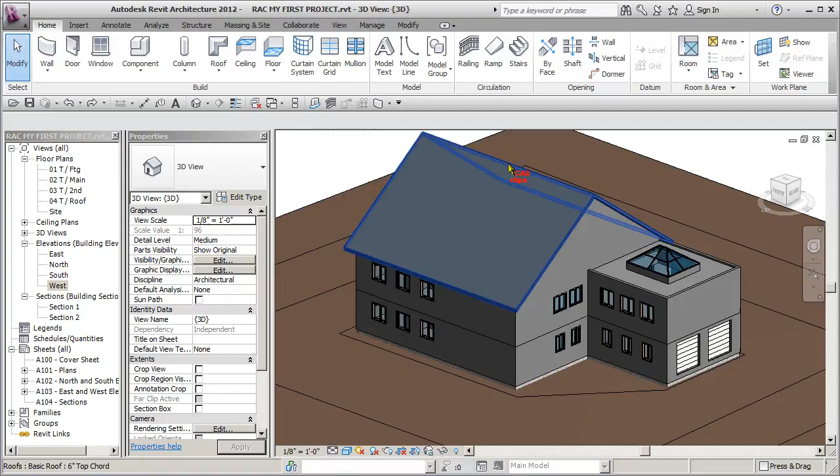In this lesson we're just going to do a couple of miscellaneous cleanups I've been taking notes on. One was on the second floor, I had an underlay I believe. Oh, maybe I fixed that. What about the main floor?

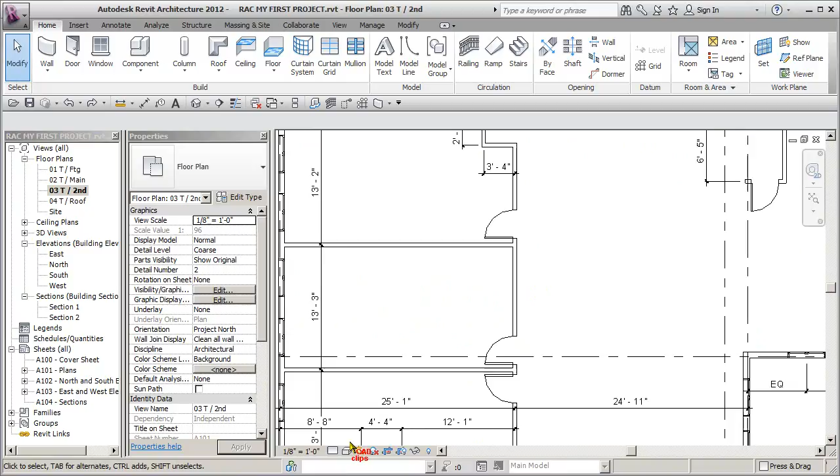The main floor, I need to fix these object styles here. It's interesting how this is showing up here but not on here. The reason is this is set to fine or coarse detail, and the other one is fine detail. You won't see those in between lines unless you go to fine detail. So I need to fix those object styles.

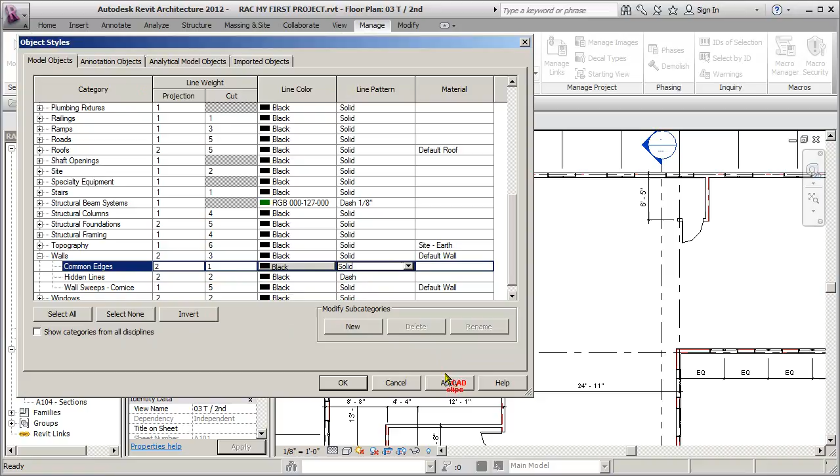So under manage, I'm going to go to object styles, and go back to my walls. I'm going to go to common edges, pick on here, and say just black. Hit OK. The color in that is good, but I don't want that, I just want a solid line. Apply and OK, and that's going to fix all the walls and all the views.

So a couple things there. One is you're not going to see the guts or the inside of the walls unless you go to medium or fine detail. Coarse detail doesn't show it. In fact, with coarse detail you can make it so that it shows as solid filled. So that's one thing we wanted to fix.

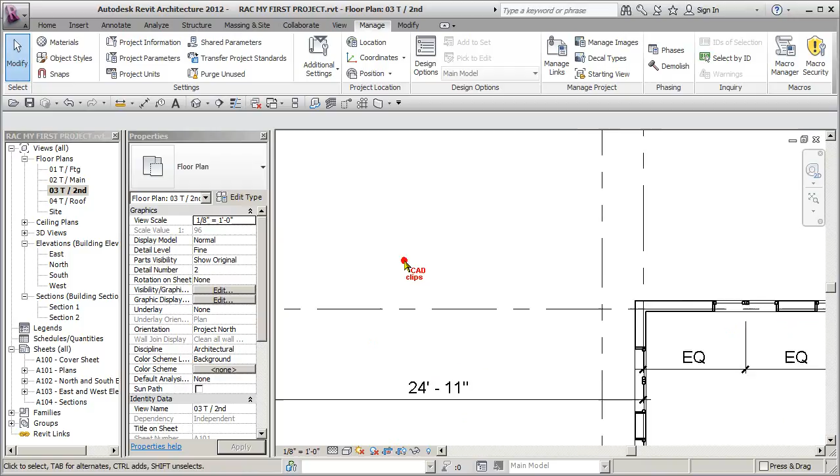I did want to make sure we had all our underlays fixed. Let's go to our roof plan. No underlay there. Second floor, no underlay. Main floor, good. Footing, good. Now look at this.

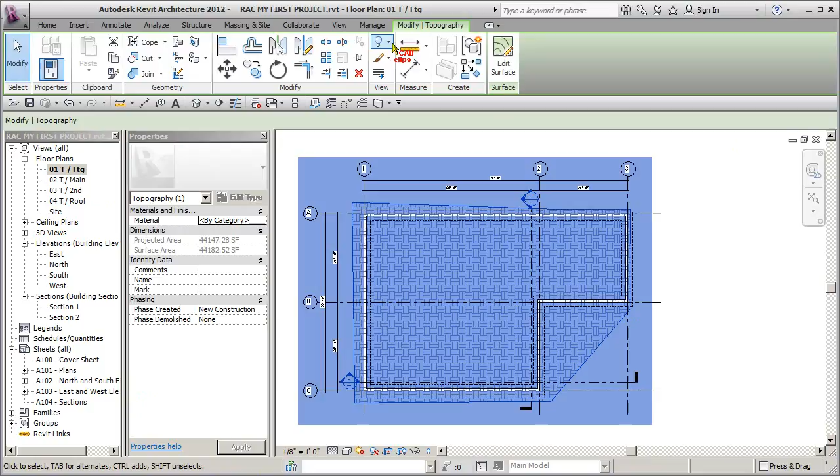We've got in our foundation plan a topo surface. So we're going to pick on here and say hide the category. We don't want to see the topo surface category. We still have some work to do on that foundation plan anyway.

That was also showing up on our elevations, and we fixed that as well. So our roof plan is good. Now our roof plan, what do we need?

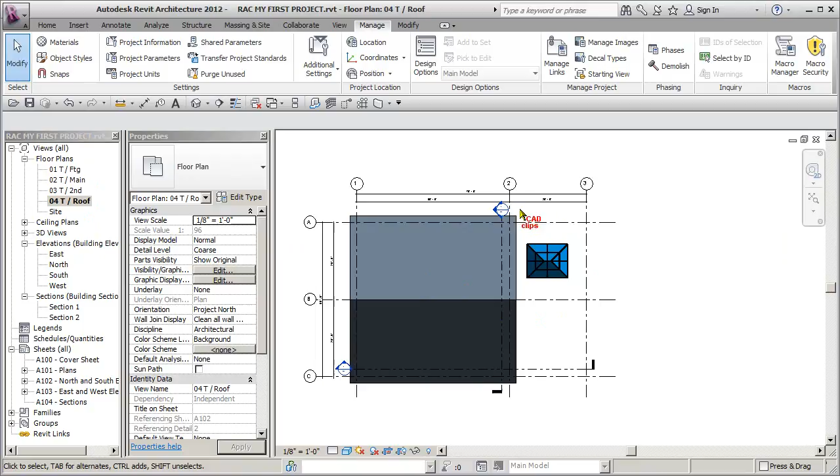We need a view range adjustment here, which is called a plan region. So what we'll do is add in a plan region. Watch, we're going to go to view, because the cut plane can't - it's up above the roof, and the bottom part, well, let's just see if we can fix this with our view range for a second.

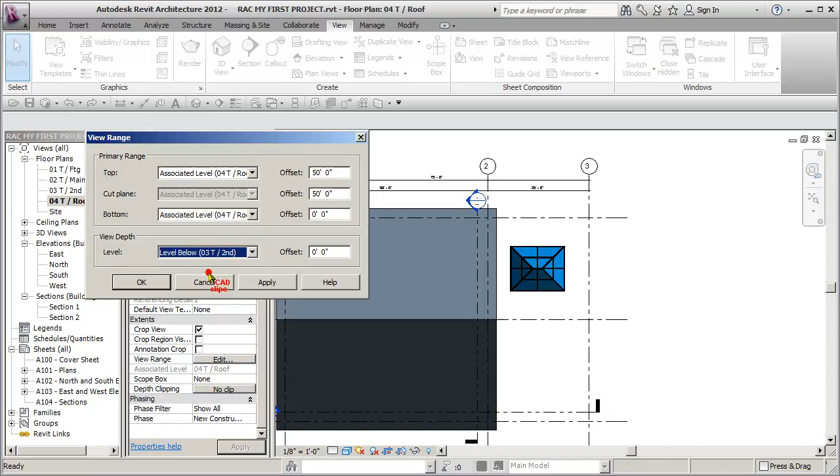Let's go to view range, and let's set our view bottom to be top of roof, but let's set our view depth down to say top of second, and hit apply. There we go, I didn't need a plan region for that. We'll come back to a plan region later. We actually just solved that with our regular view range.

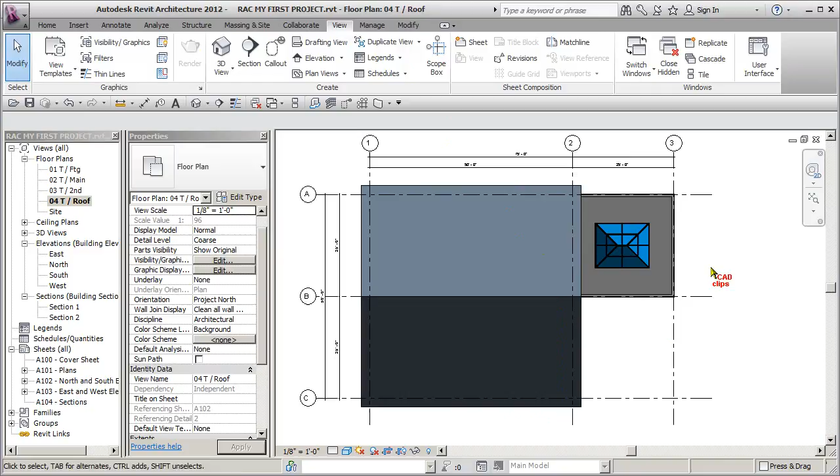Now maybe on our roof plan, I'm going to use my control button to pick these two guys and hide that category. So I'm just going through the views doing some miscellaneous updating. Site plan looks okay for now.

Okay, how do our elevations look? Not too bad, we can add shading and detail. Oh, we need some windows over there. We need to add these 3 windows, and I believe there's 3 windows above on this side.

So what are we going to do? Do we want to do it in plan or in elevation? I'm going to do it in elevation. I'm just going to go like this. Okay, and it's going to say that I have these windows. So what am I going to do? I'm just going to go like this, and say copy.

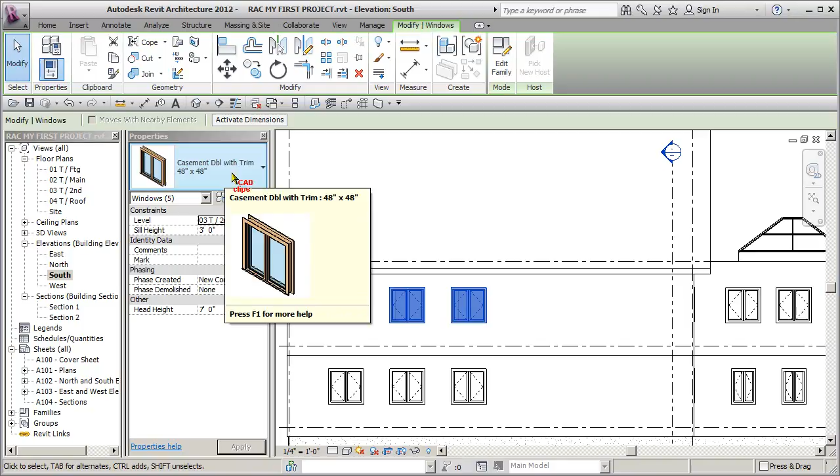Who cares, from here over to here. I'm not even going to worry about the distance. Escape, escape. Okay, that's actually not too bad.

Let's go to our second floor. Now I can take this and say edit witness line, which means continue from there. Over I go. Okay, escape, escape. Well, just a sec now.

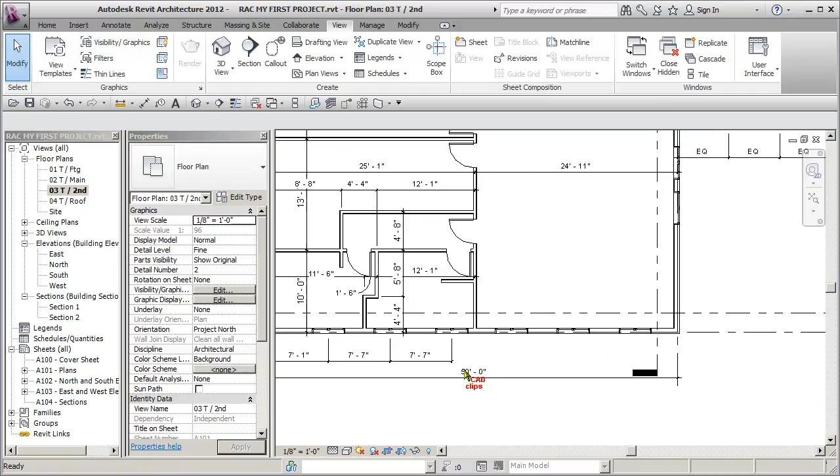That did something funny. Edit witness line. Here, here. Escape, escape. Now there is a piece of a dimension in here.

I'm going to turn my press and drag back on. That dimension, I'm going to delete because it looks like it has something that's not visible here. I'm going to turn that off. I'm just going to create a new dimension - not sure why that's behaving that way. Go from here and then go through these windows.

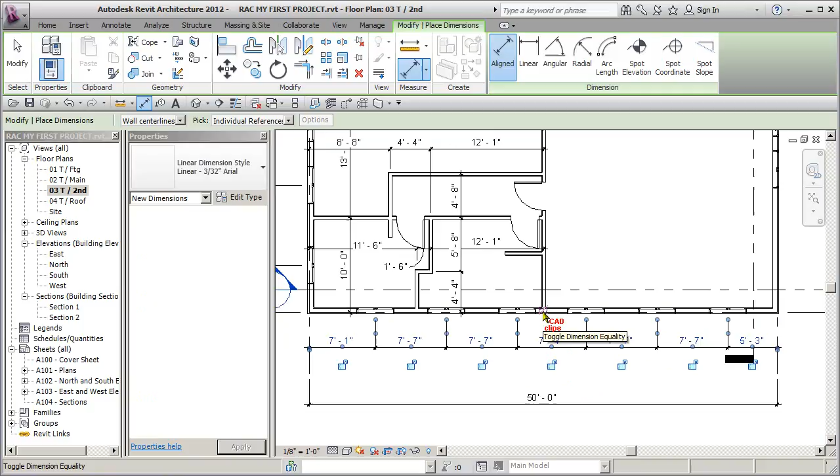It's very easy to just delete and select. I think there was another leg of dimension there, but for some reason it wasn't showing it to me. Click on there. Now, do I want those equally spaced? Look where the equal is there. Click - now it's equally spaced.

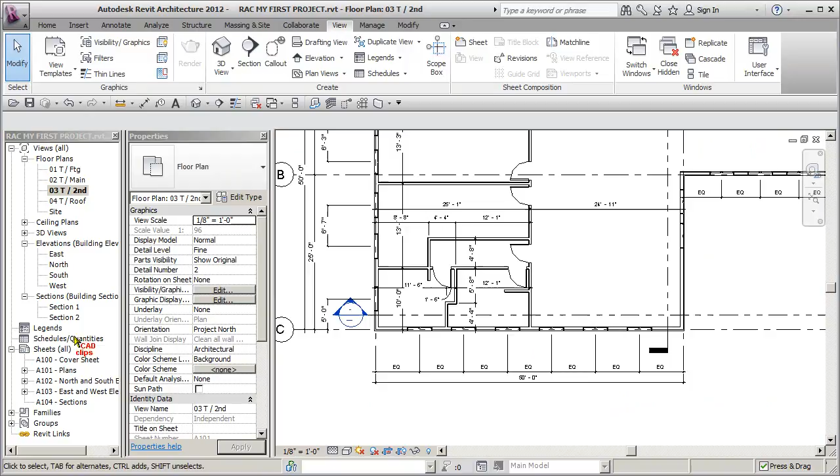Escape, escape. What does that do to my windows? That kind of works with my walls. Do I want to pull this out a little bit? Maybe pull this back a little bit. Take this, use my arrow key, nudge, nudge, nudge. Now when I go back to my south elevation, they're going to be all beautifully spaced there for me.

Now do we want to maybe vertically align these? Let's do this, let's go to modify. Let's say align to here, this guy. I can even lock it. Align here, this guy, lock it. Align here, this guy, lock it.

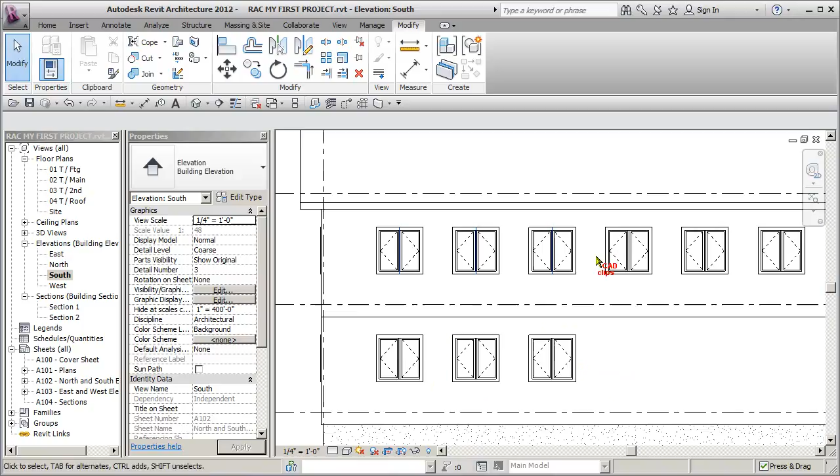Now this is a tricky one because I've aligned and locked these to these, and these guys are to be spaced evenly, so you have to be careful with that. Probably not a good idea to lock those. But we can align them, and we can align and lock them.

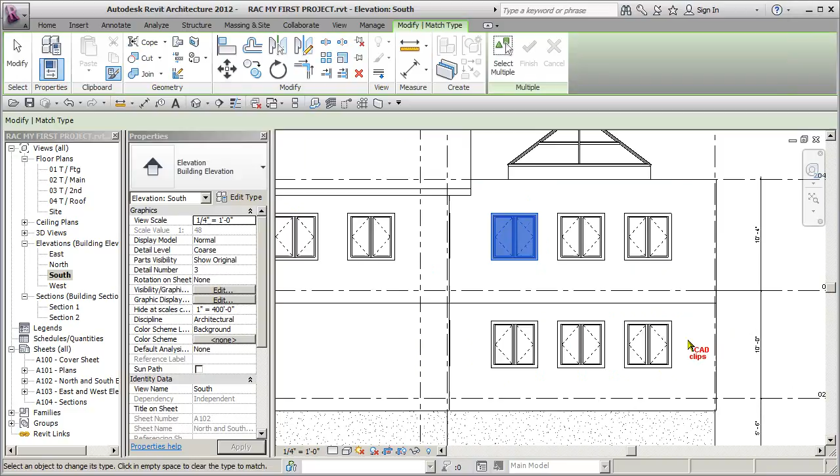Now what's going on? These are smaller windows. I must have made a type change, at 32 by 48. So what am I going to do? I'm going to use my match type and match this to be these guys. So change these guys back, escape, escape, and they look like they're vertically aligned.

Let's go to my east elevation. Okay, now I need some windows over here. Oh, these guys are... yeah, they are backwards. Okay, I've got to flip those back around again.

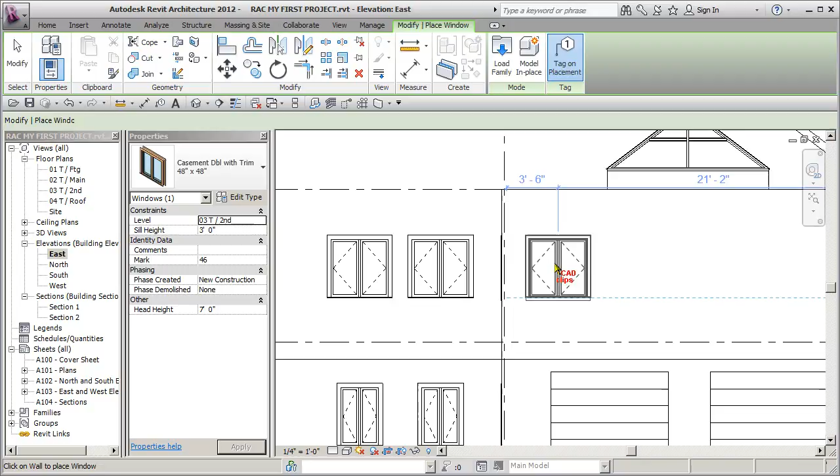I'm going to click on here and say give me one of these, create similar. So now I can take this and you can see it's going to align it. I'm going to place that and go 1, 2, 3, escape, escape.

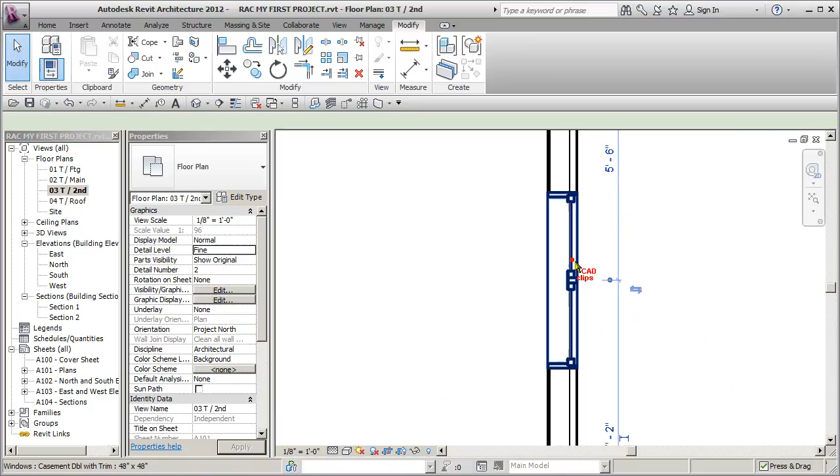So to me that is the inside of the window, but sometimes the way these windows are made, I'm not exactly sure. So there's those 3 windows. Okay, now to me that window should be like this, with that on that inside.

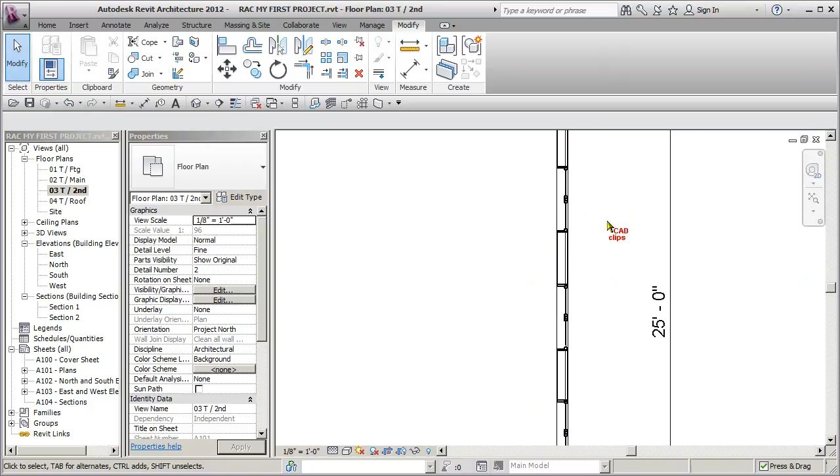So I'm going to take these guys and flip them. Okay. And then, no, I think it is the other way. With the little sill on the outside, and I guess the trim is on the inside. I thought the trim would be on the outside.

Let's do some dimensions. Click here, here, here, here, and here, and place it. Do I want them equally spaced? Yes. Click. Click out. Escape, escape.

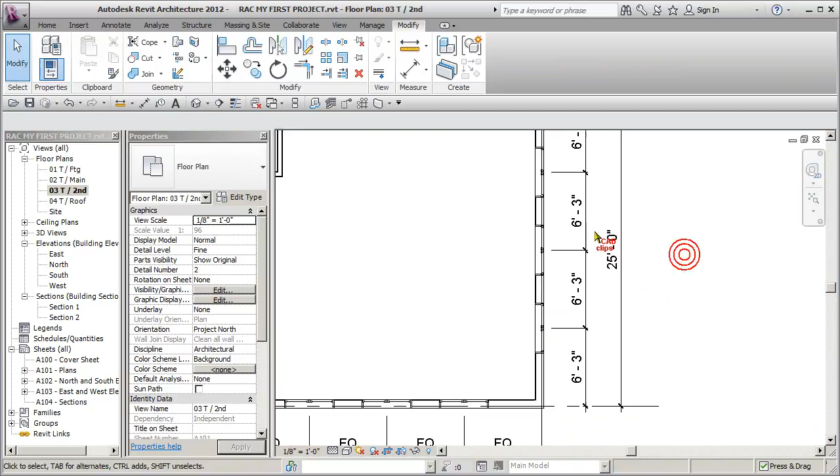Now, if you forget to click the equal button and you want to do it after the fact - I'll move these over so they're not equal - okay, you can always pick the dimension after the fact and say equal.

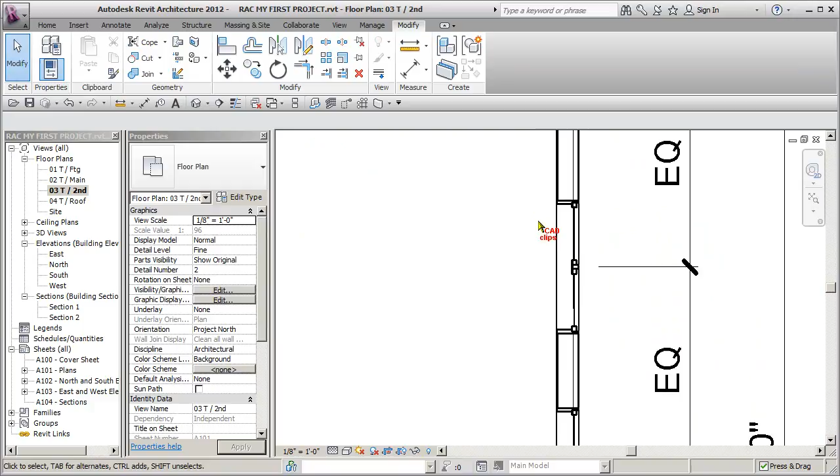Okay, what I'm going to do is a bit more cleanup, and then I'm actually going to come back and open up this window family, and I'm going to determine once and for all which is the inside and the outside, because this looks like that should be the outside, but when I look at the elevation it looks like it's going the wrong way. So we'll investigate and find out.

So what other cleanup do we have to do? Let's look at our top of roof plan. Okay, inside of here I wanted to drop in some little roof drains.

We can do that in a 3D view if we want. So it doesn't matter, we can go to a 3D view, zoom in here, shift middle mouse, hover over here, pick the roof, say add point, and then set an elevation relative to the top, minus say 2 inches. Don't forget to say inches. And remember when we created that roof type, we made the top a variable thickness.

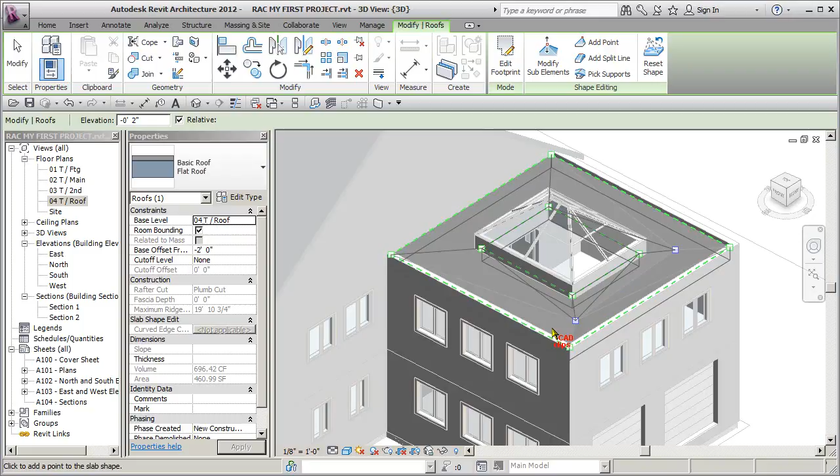So I'm going to go pick, going to go over here, and I can do this in a plan view as well. Pick. Okay, that's it. I can hit escape, escape, or click modify, and there we go.

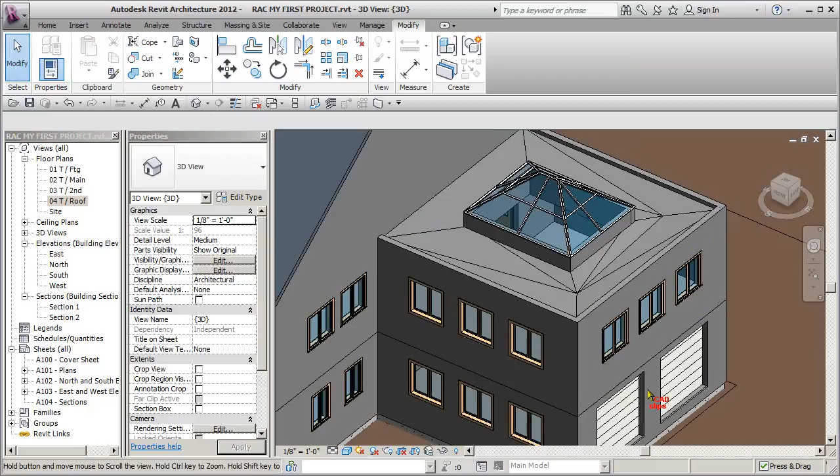There's my roof. You can also go down here and pick your sunglasses and say isolate this element, and it'll isolate that just like that. Go back to your sunglasses and just say reset. So you can quickly isolate objects if you want.

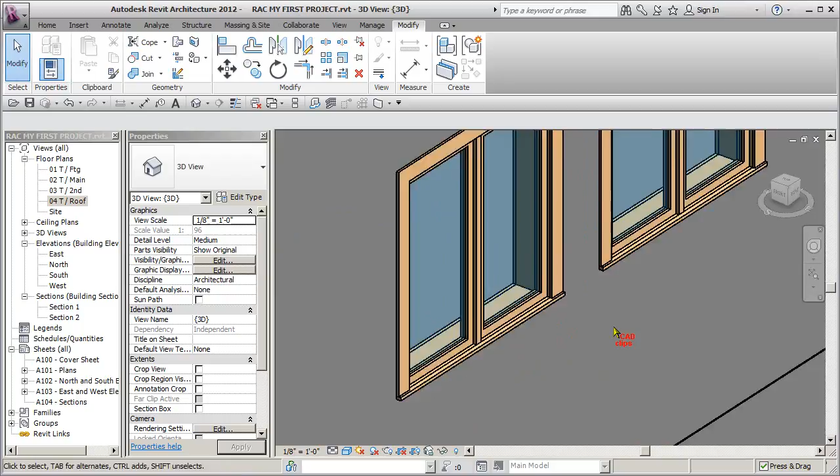And I think that was it on my list of cleanups at this point. In the next lesson we'll come back and have some fun. I'm going to open up this window and find out once and for all where is the inside and where is the outside of that window.